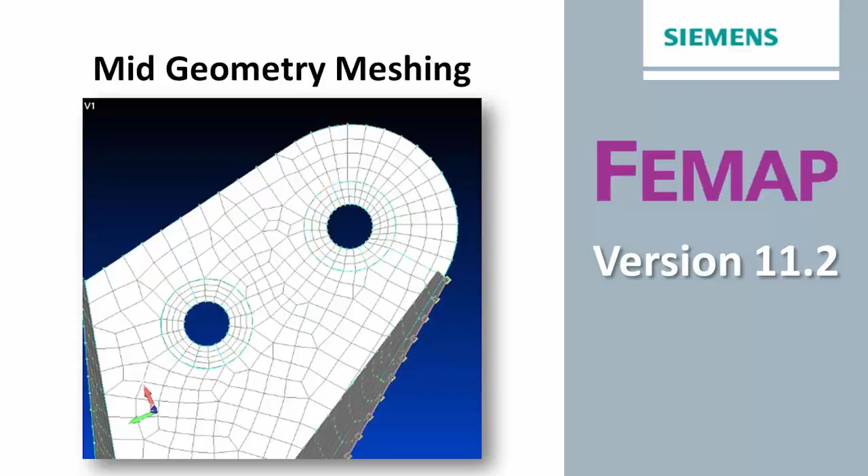I just wanted to show some of the new geometry tools in Femap version 11.2. This little bracket assembly comes from NX, and I think the NX CAE team uses this with some solid meshing.

What I'm going to do is take this and do some mid-surface meshing and some connections. It's kind of a typical welded structure where the parts really don't come fully together, so we're going to do some work once we mid-surface just to get everything connected.

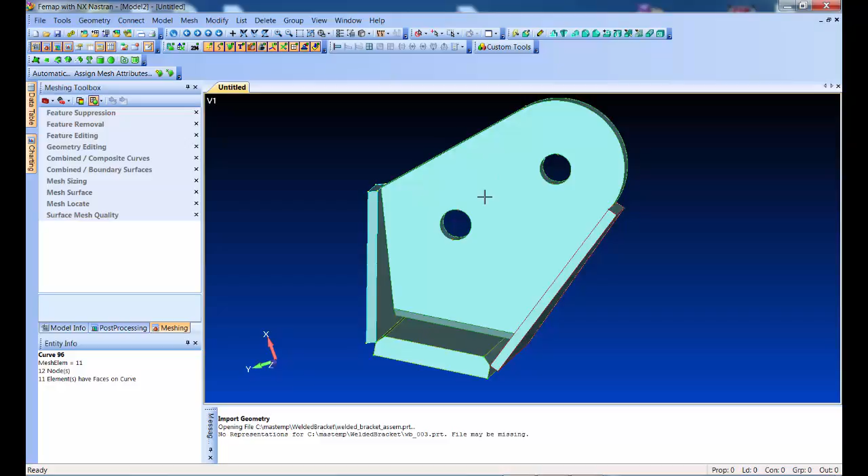But the first thing I'm going to do is just do an automatic mid-surface, just pick everything in the model. Say OK, and I already know this is about 25 millimeters thick, so I'll just set that as my target distance, and you'll see it quickly finds all the mid surfaces. I'm just going to turn the solids off.

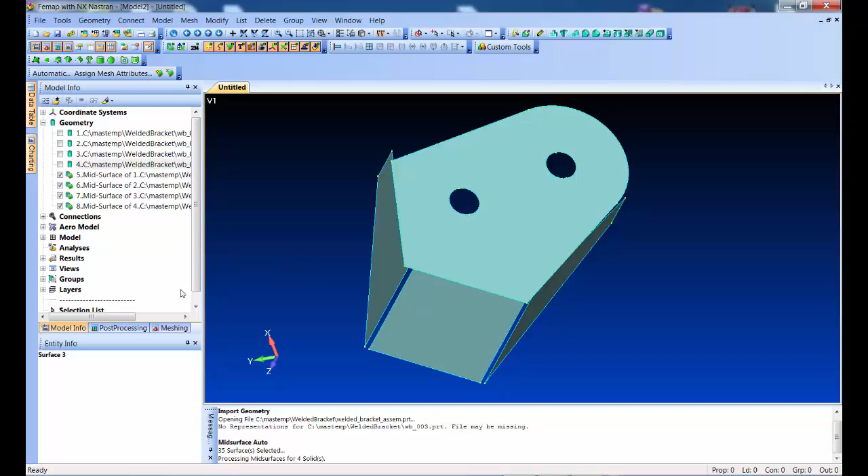Now the first thing I'm going to do is show you some tools we have for just extending and connecting these pieces together. I'm using some stuff in the meshing toolbox, and since I'm using that a lot, I'll drag it out here and hook it up right there.

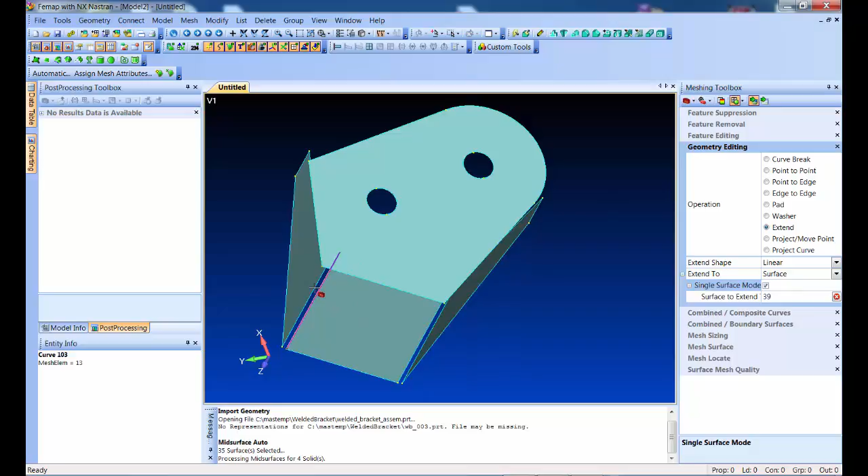So the first thing, let's do just some geometry editing. We got extend, and we got a new thing where I can just go one surface at a time. So what I'm doing now is I'm picking a surface, picking the curve I want to extend. You see those two guys now connect, so we're just bringing that corner together.

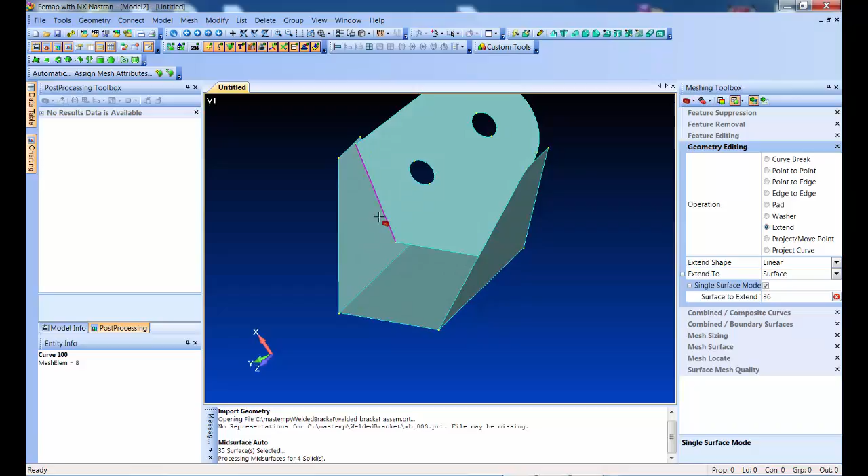We'll do the same thing here, and then just pick kind of the opposite guys. Now they're all connected together, and then we got to do the same thing here. You can see we got to get this middle piece connected, so I'll pick the surface, pick a curve, and it just shoots them right on there.

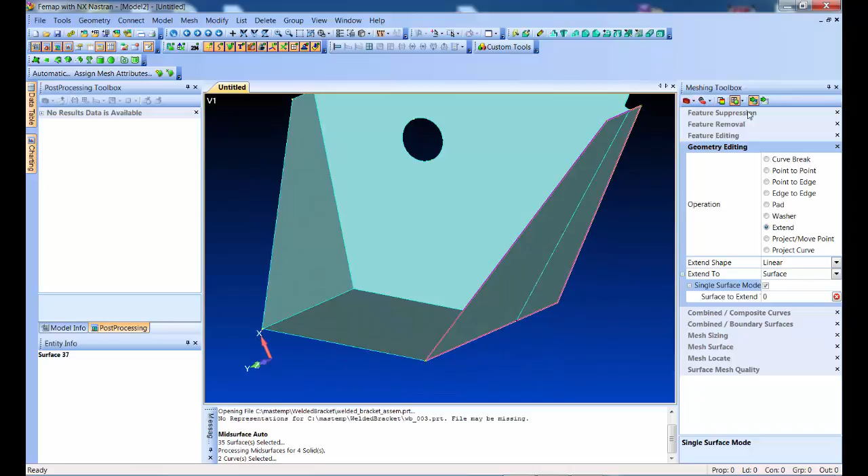I'll do the same thing over here, pick the curve, and I see now I got two, so I'm going to pick my surface, pick my curves I want to extend, and pick both of these guys, and you'll see now that everything is kind of put together nicely. So at this point I can just turn that tool off.

You've probably already seen it, but I see it here too, that this thing's really not connected right up to the end here. We do want to get that connected. So the other thing we had is just moving points around on geometry.

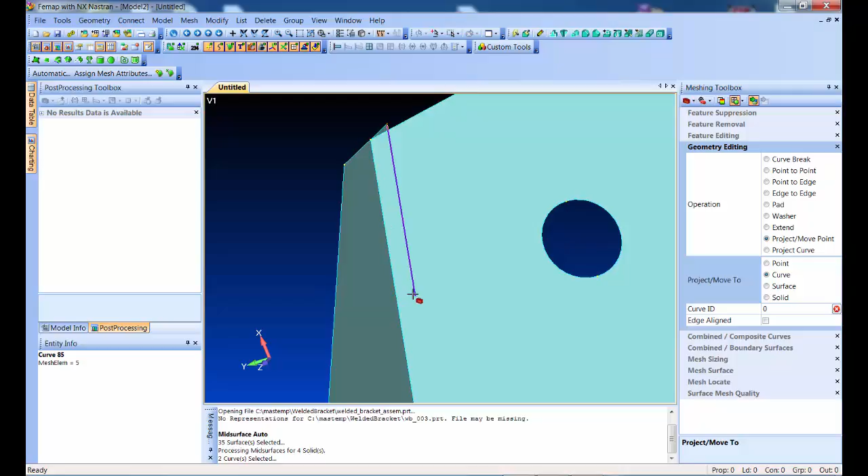So I can just pick, basically you pick the entity you want to go to and the point you want to move, and you'll see it snaps right up there. And the same thing's true kind of over here.

I see that that point's a little bit high, so let's pick that curve, bring that point down. And the same thing's true, I can actually go and pick this point here and just bring that all together, and just going to have much cleaner surfaces to mid-surface.

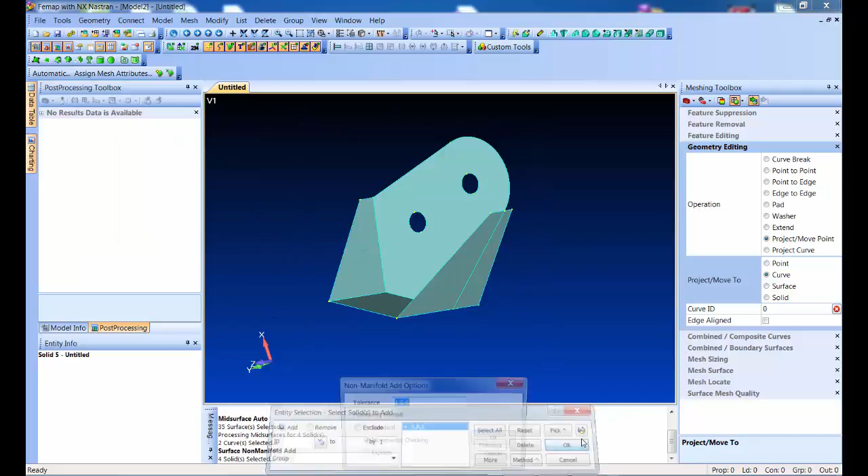So now let's connect them all together, and let's just do a non-manifold add, we call that, and that's to take care of these T-junctions and such. We'll just put those in. It shows you the free edges and shows nothing on the connected edges. So we got a nice connected piece of geometry here.

Now one nice thing I want to do is let's just make sure there's no short edges, and Femap says, oh, there's two, so we can use the entity locator to show me these short edges. You can see what we got down here is just a little bit of overrun there, but that's where that tool comes in handy again.

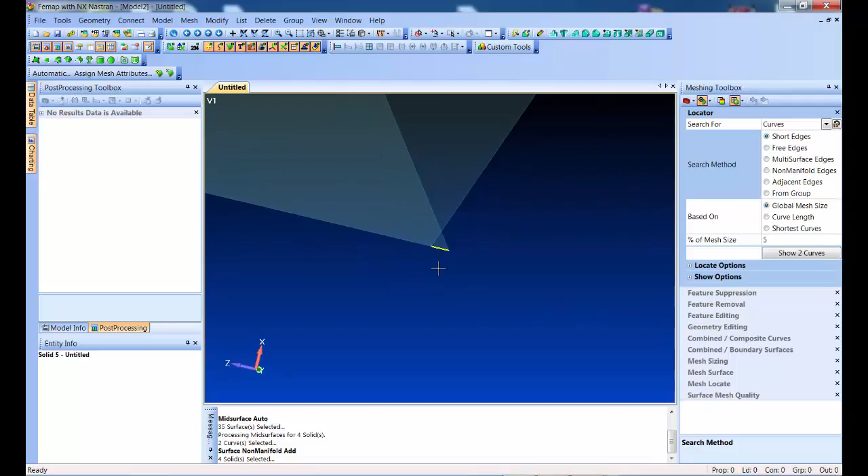The mesher would actually automatically skip him, but just to clean everything up, let's just move that around one more time. Pick the point I want to go to, pick the point I want to move, takes care of it. We'll go find, there's a similar condition on the other end, so pick that. Now everything's completely connected. So now let's just throw a mesh on this and be ready to go.

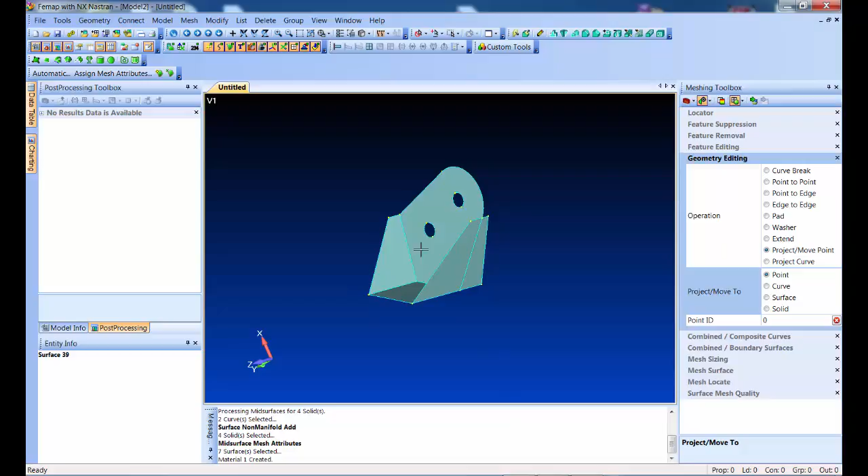So we'll assign mesh attributes, and this basically remembers from the mid-surfacing what thicknesses to put on. And we'll just pick an aluminum here to make the material. So now Femap's connected or created the properties required.

Here's the different thicknesses it came up with: 10 there, 20 there, and 22 here. Looks good. So let's go ahead and assign some mesh sizing.

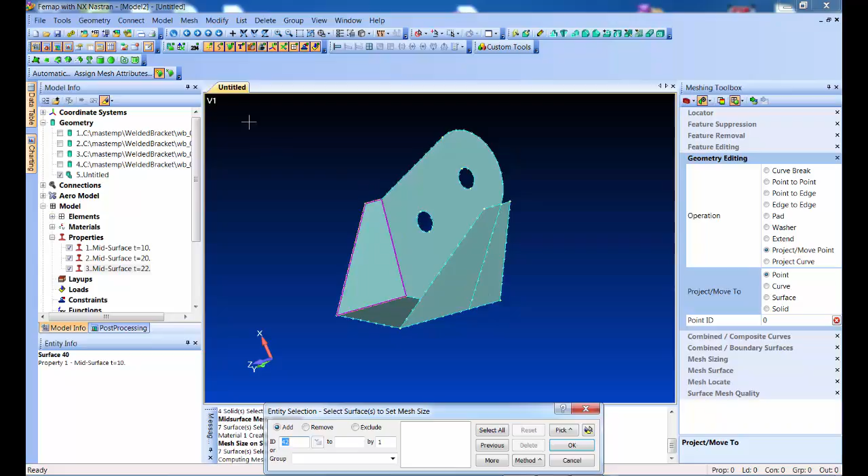This will just assign, I'll let Femap pick a default, and then we'll mesh the same surfaces. So I hit previous, we'll put down that mesh, and you can see there's a pretty nice mesh. Now, if I really want to get a lot of control going, and actually look at that, I see some short edges. I guess they weren't short enough for the other thing.

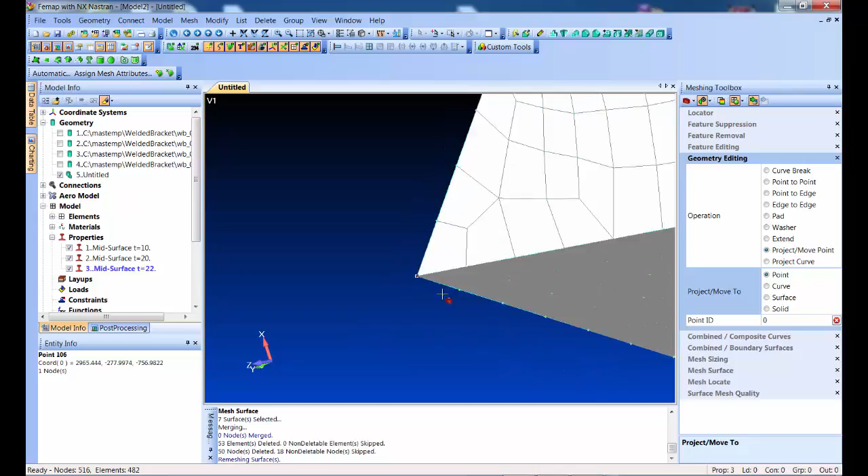The setting was still too high, but we can still take care of these. Pick the point I want to move, updates the mesh automatically, and there's probably a matching friend on the other side. Maybe not. Things are looking really good there on the mesh, but just to go a little further,

let's get a really nice mesh right around those holes. I'm going to burn a washer in around there, and you see that it also assigns a map mesh to that washer. Get an absolutely perfect mesh. So much better mesh around those holes.

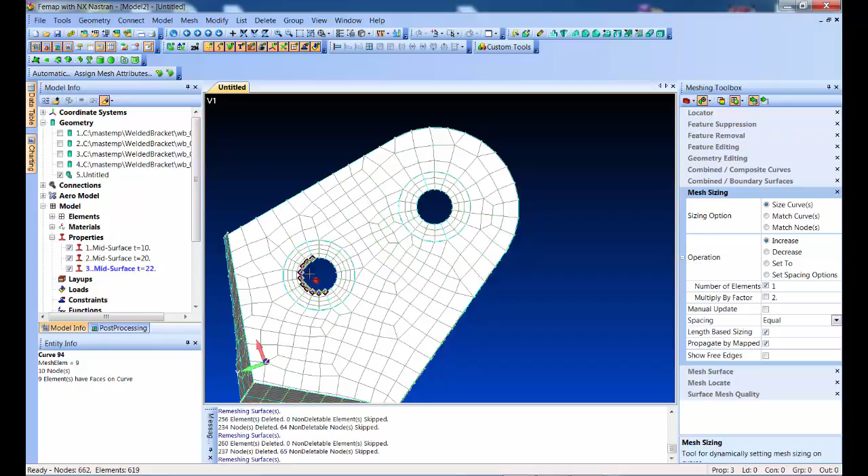We could also make that mesh size a little tighter if we really wanted to go down. So I'll just go down like this and change the mesh size here, and just double down. And you can see how you can get to a pretty nice mesh pretty quick.

If you wanted to really get a lot of control going here and get a map mesh out here as well, some other nice tricks here, I can just do some more splitting, and we'll just split from there to there, and we got our point here and here.

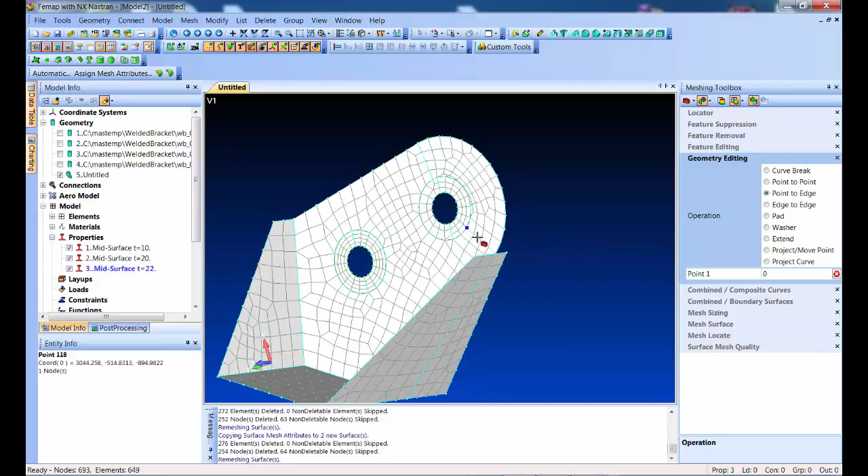And then what we can do, mesh sizing wise, I can see there's 14 out there and only 7 in here, so just bump him up. I'm just doing it one at a time. I could just go type the 14 in, but I'm not.

Let's go do one more, and let's see, we got 4 there, 4 there. Oh, we got that one little edge here, that's why we got to go up one. So there we can get a real nice mesh right in that area too.

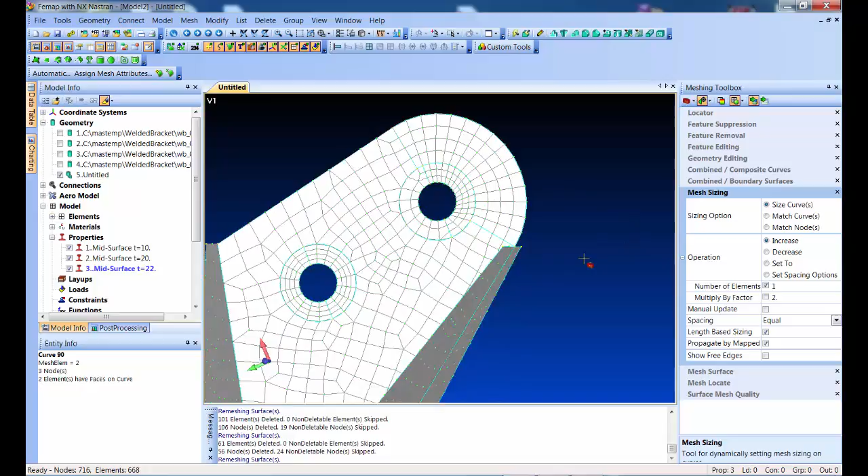So pretty easy to get a mid-surface mesh, pretty easy to tailor that mesh to exactly what you want.